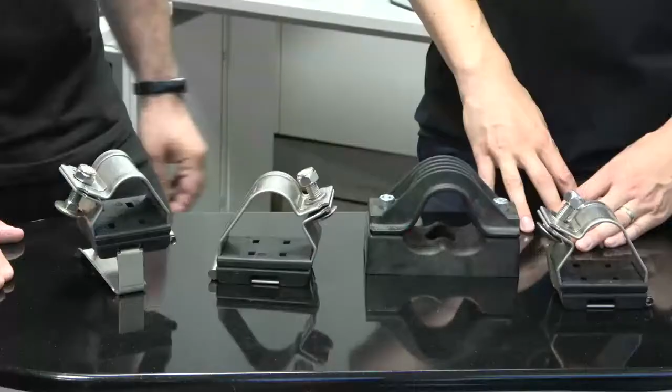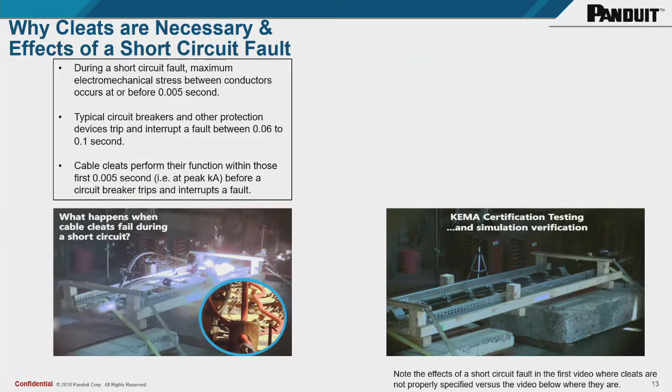We also have prepared two videos for you showing a short circuit fault with improper and proper installation. First, we will show you the short circuit fault with improper or no cable cleats at all. So, Tim, can we play the first video, please? This is the video on your left.

As you can see, the damage can be quite bad. The cable cleats were not installed correctly. As you can see, they fly all over the place, which is not very safe.

Would you say so? Yes. I agree with you. So, what can we do? I mean, how does it look when we have properly installed cable cleats? Okay, but before that, how can we specify the right cable cleats?

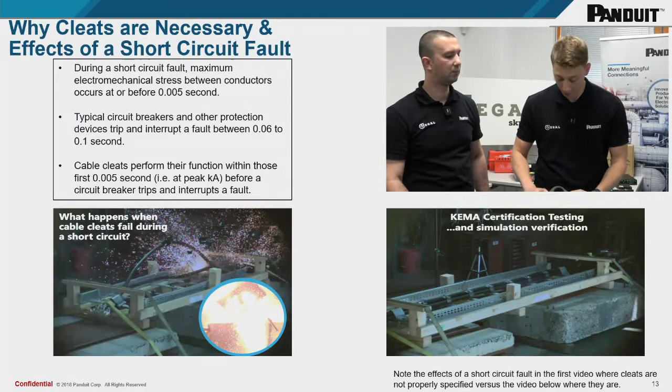Excellent question. So, for specifying the right cable cleat, you need to know the outside diameter of the cable. So this is trefoil, we will touch this later a bit more, and peak short circuit fault level in kiloamperes. Because if you use polymer and the short circuit is too strong, it can blow them away. Better to use this one.

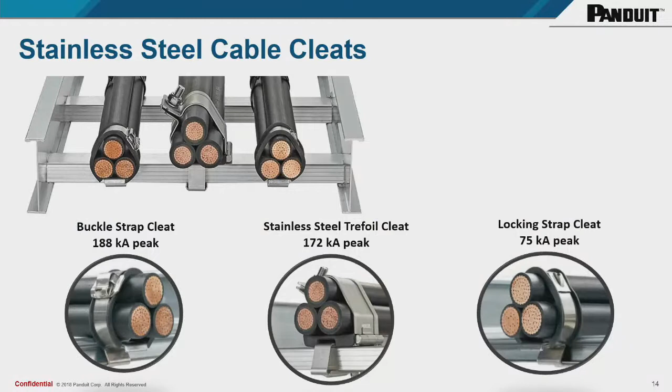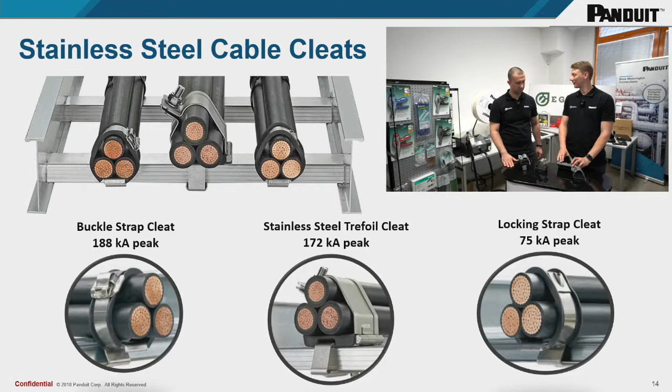Yeah, we have a few different types of cable cleats. So aluminium, stainless steel, polymer, also different layouts. So trefoil for 3 cables, it's for 2 cables and for 1 cable as well.

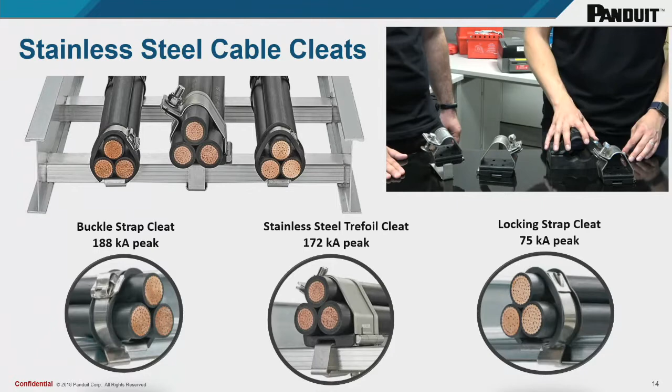Okay, so a lot of different designs, a lot of different materials, each for their specific application.

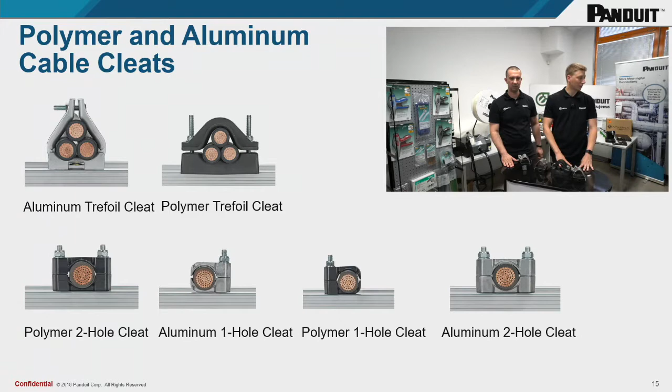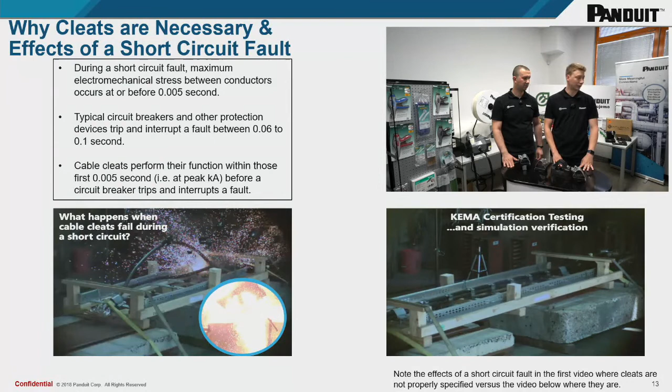Yeah, so video on the left is improperly installed cable cleat, and video on the right is properly installed cable cleat. As you can see, the difference is obvious.

Excellent. Good. Yeah, so this can be very dangerous if installed improperly and people are nearby. Wouldn't you say so? I agree with you, Peter.

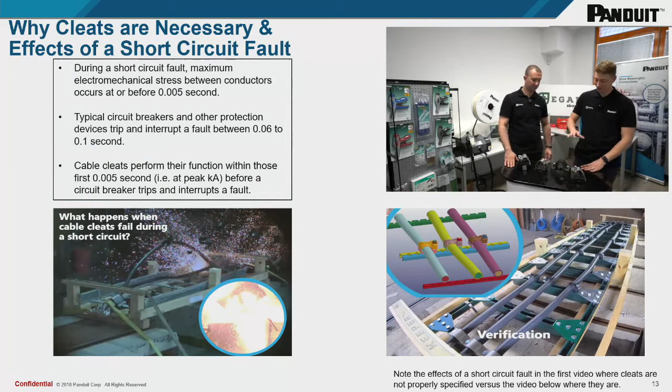Thank you, Senad. So yes, we have our next also very interesting product launched from Panduit, especially made for ICMRO, but also for original equipment manufacturers, right? Yes. Yeah.

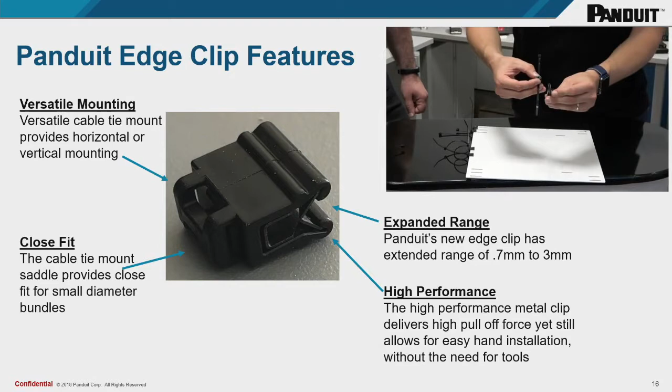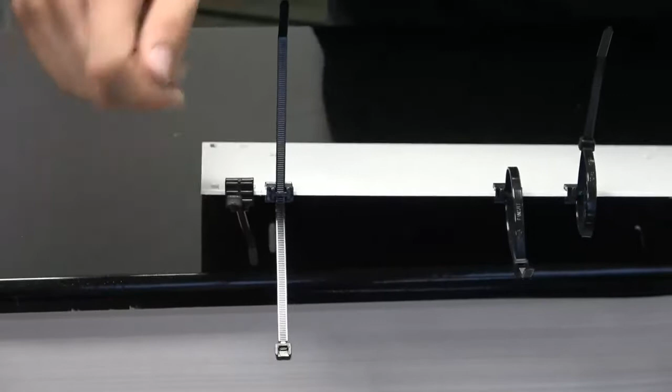This one is the small one, this one is the big one, and this is what we almost forgot to mention - they can be mounted in different directions. As you can see, this one can be mounted from the side or from the bottom, as you prefer, or top, and this one can be mounted on the side.

Also, one important thing to know: you can also order them wider and mounted from side to side, not just up and down.

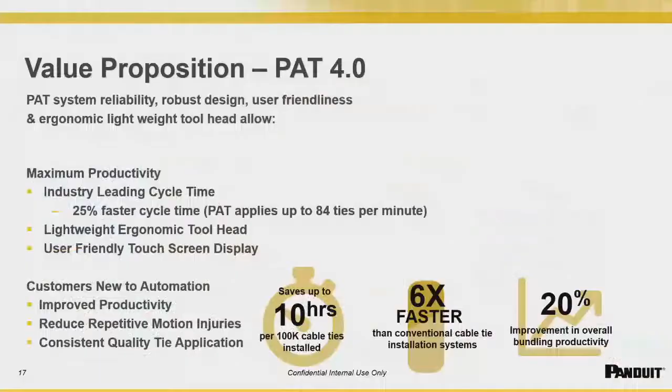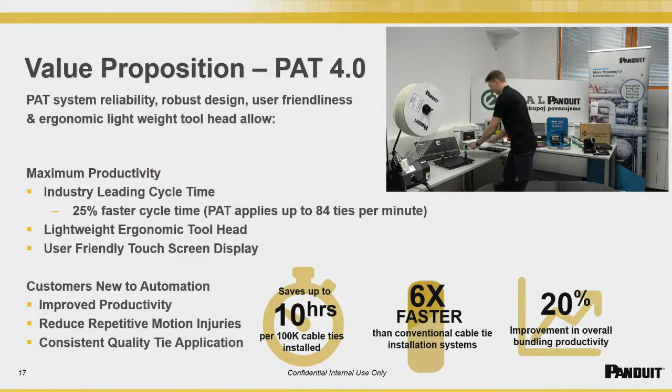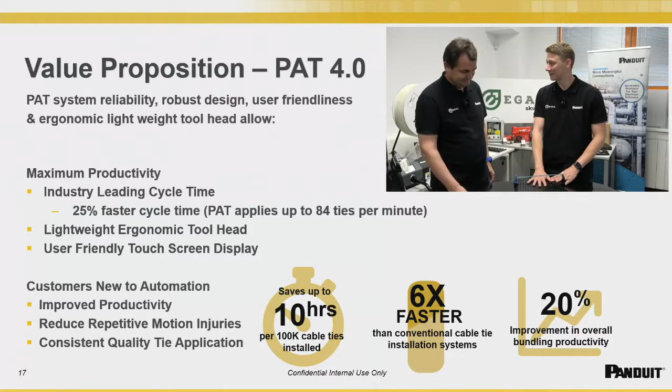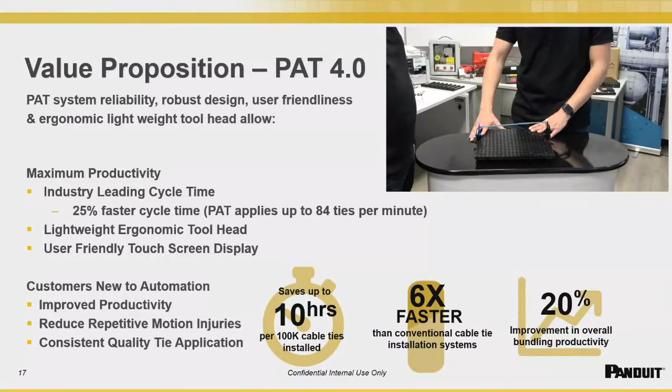So this is not a PAT system, this is a wire harness board - it's called Quick Build. It's modular, it's easy to install, it's easy to move the wire harness from one point to another. It has a lot of different accessories.

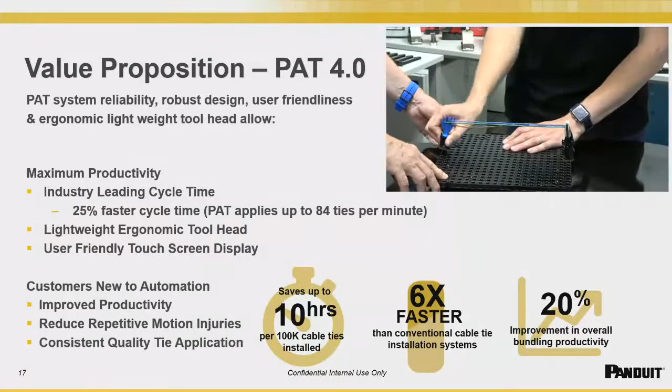It is very interesting though, it reminds me of Lego when I was a child. Yeah, this looks like a Lego - you put the pieces together really easily.

What we do with the harness when it's installed like this is apply the cable tie. And now let's introduce this one - shall we put it here? No, we can leave it here.

First, let me just point out this is a pneumatic tool and it needs compressed air, so we will just pump some air into the system. I like this sound, it sounds very industrial. I think five more seconds should be enough.

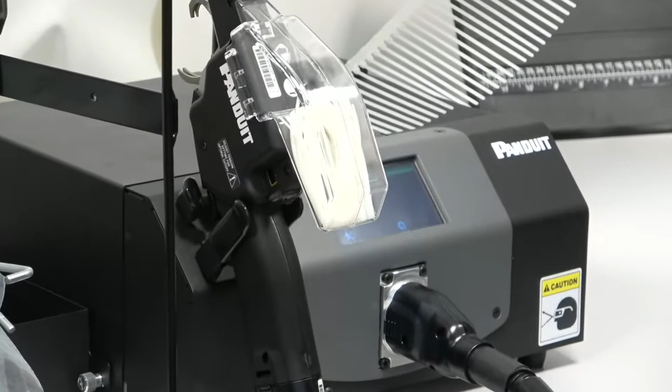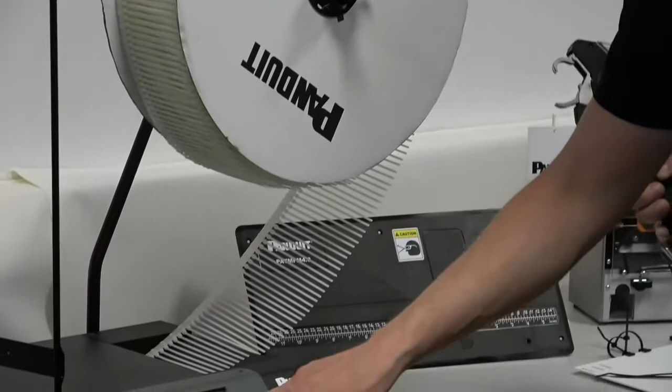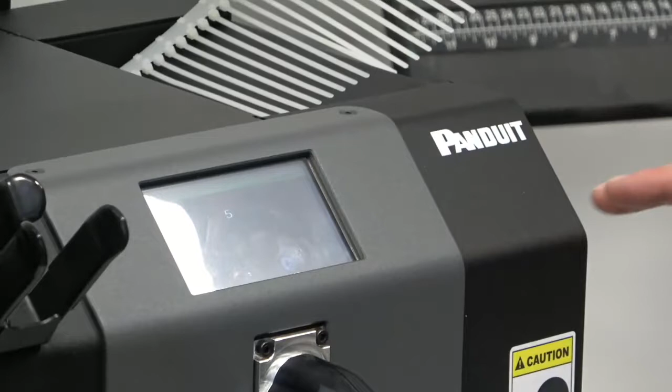Now let's first walk through the system - let's start from the top and move to the bottom where the magic happens. This is our cable ties on a reel made specifically for this PAT system. A nice bright touch display allows you to move through settings easily. There's a dispenser for the tool head, and the tool head itself is here.

Then we have the hose which transfers the cable tie, pushed by compressed air, to the tool head, which wraps it around and cuts it off. This hose is quite long - it's 3 meters long, so for very big stations or big installations it can come in handy. But you can also get it in shorter versions.

Let's try to demonstrate it. How fast does it work? It's very fast - it can dispense up to 84 cable ties per minute, as you can see.

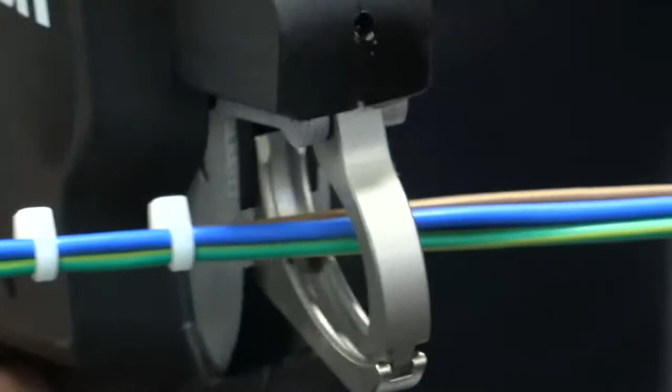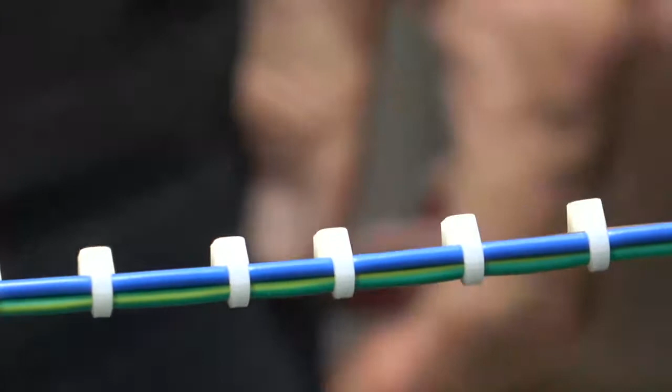It also cuts off the cable ties. How many times faster is it than, let's say, a worker with an ordinary tool pistol? I would say at least 15 times faster, because the worker needs to wrap the tie around the harness, apply pressure, and then cut it off. With this, everything is done in one cycle - it's really nice and easy.

Let's try it again - we just need pressure. Here we go. It also recognizes faults that can happen, as you can see here.

So Ales did like this. You just put it out, and it says remove tie from tool jaw. You just ignore it because we already removed it, and then in this dispenser, the rest you can say is eco-friendly.

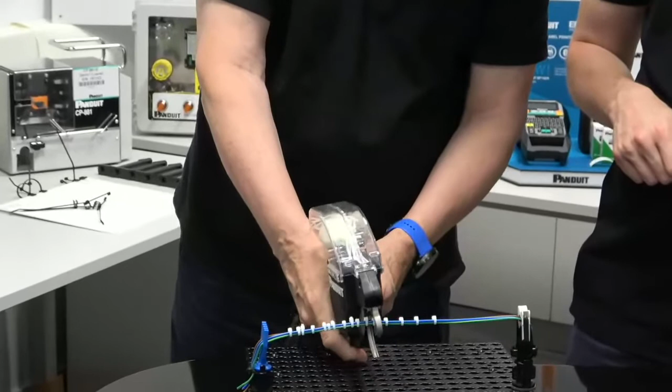I see we have a question from the audience. Is this tool just for one type of cable ties? Excellent question, thank you Egan. So this tool is made for actually 4 different types of cable ties.

This is the smallest, PLT1M, it's 10 centimeters long. The other length is 14 centimeters, it's a bit longer. You need to also replace the tool head. It's mounted fairly easily.

Put the tool head with bigger jaws on, and then just replace the cable ties. The cable tie comes from the device through this hose, going here, through this small hole, and going into this one. Can you see?

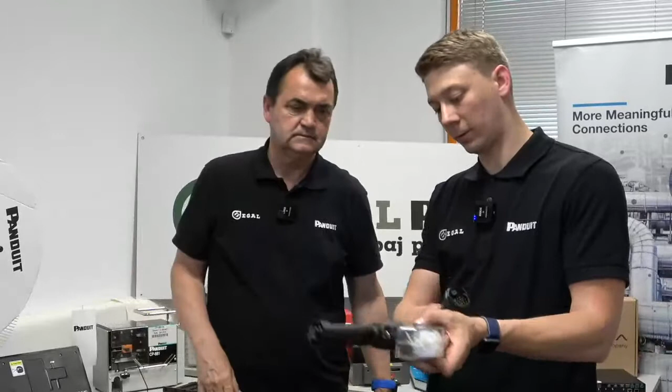And then it goes from the jaw, wraps around the cable harness, and when it recognizes the correct pressure, it automatically cuts off the cable tie, and the excess is put here, so you don't have to pick up the cable ties later from the floor.

One question, because this is very fast and effective, for what kind of industry is it suitable? It's suitable mainly for wire harness manufacturers, for different types, so it can be automotive, it can be white goods.

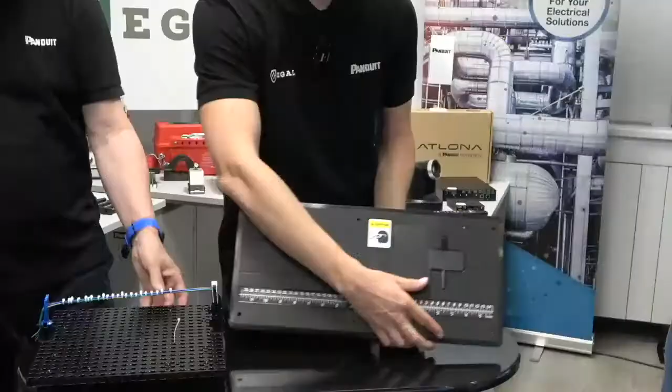I see we have another question. Can we provide also a special accessory? Of course, good question. Yes, we have Panduit just recently launched a new product, it's called flush mount bench mount. So I will put it like here.

Actually, it's installed. You put the tool head right here, and put it on the table like this. It's heavy, it doesn't have the right support. So actually what it does, it allows the worker to be more efficient with simpler harnesses, like this one here, so they don't have to do it like this.

They just put the harness to the tool, and then the tool makes their job like this. They push it like this, and then the signal is sent automatically to the system to dispense the cable tie. One thing I see also when I touch this, I don't feel any rough edge. Yes, it's quite nice.

Most probably, when you install, yeah. Excellent observation, Ales. So this Panduit PAT system cuts the cable tie flush, so there is no excess looking out of the cable tie head, and eliminates the risk of getting scratched with the cable tie.

Good, nice. I see we have a question. Can we adjust a tension? Yes, we can adjust the tension already here on the tool head. We don't damage the isolation of the cables, and we can also adjust the internal pressure right here in the tool itself.